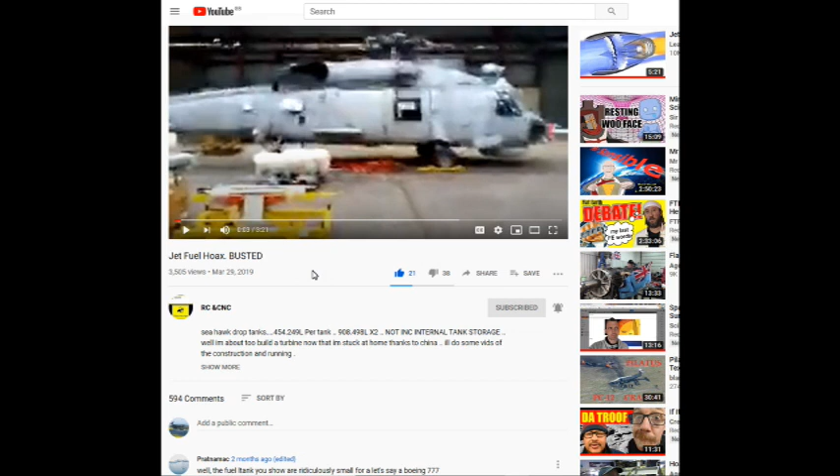I've been having a bit of a laugh over here on this channel, RC and CNC. It's a video by an Australian chap who's obviously worked on Australian Navy Seahawks in some form or another, and he's made a little video showing off the fuel tanks etc. of the helicopter.

It seems to have attracted comments from some real muppets in the world who have got no idea of reality. In one particular case, we have a Greg Lavy. He seems to be quite vocal and wants to make a big song and dance that he is Mr. Simpleton.

He quotes a passage from an article written by this Maxwell Chapman, who was highlighted on another Truther channel. It's hilarious to read it, and there's no way this Maxwell Chapman could even have possessed a pilot's license. He is so stupid, but truthers believe rubbish like that with no facts or proof. They're so simple, they'll believe anything. Clowns, really. But let's have a look down here.

One of Greg's - Greg has started these conversations demanding where 36,000 gallons go in a 747. We shall come back to that in a while, but let's look at this particular entry of his.

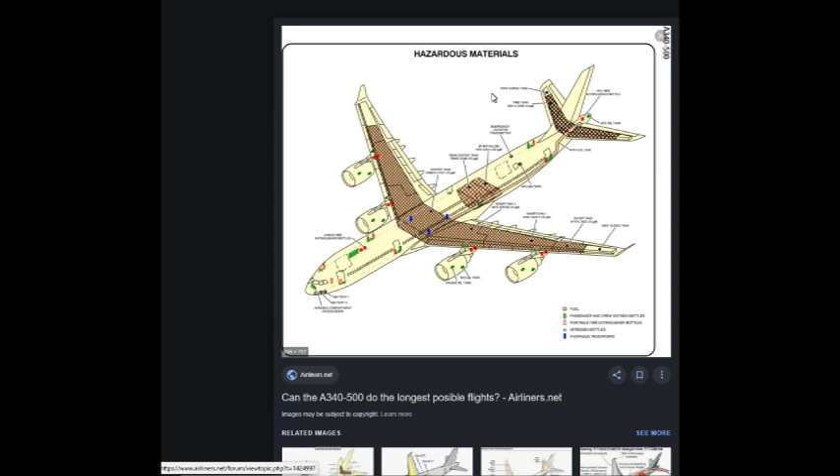So I think you're a bit of a clown really, aren't you? Because you need to look at these figures. Ladies and gentlemen, this is Greg. Greg's a clown.

And we shall now show him where his 36,000 gallons will go on a 747-400. And that 14,521 gallon figure he quoted also can go on a 747-400, despite him using that schematic of a 340-500.

Let's take a look. Oh, look at that - 25,000 gallons in just 2 tanks. And we have a total of 53,864 gallons in the entire aeroplane. And if you've got the 747-400 with the optional horizontal stabilizer tank, that increases its capacity to 57,164 gallons.

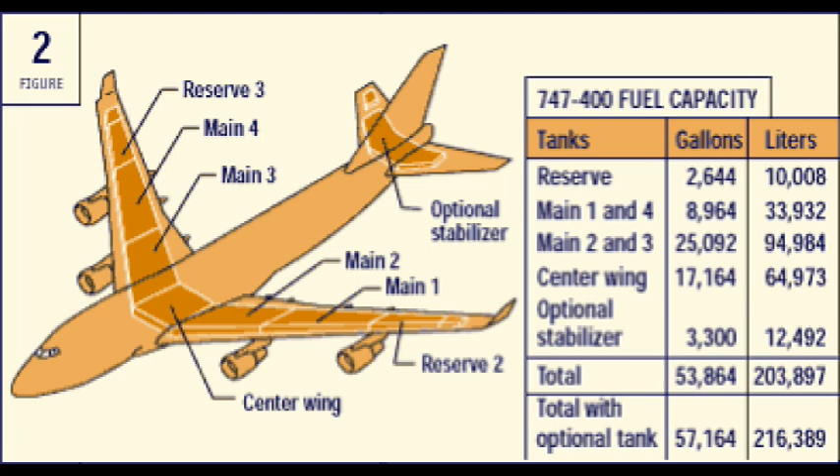So Greg, now feeling a bit foolish? You don't seem to have done much research here, have you, boy? It is clear that Greg thinks he's Einstein here, but in fact we can all see he's one of these - a clown.

But his comedy routine isn't finished quite yet. There's another one of his comments we've got to have a look at. That's very, very hilarious. And now let's see what Greg has to say for himself in this comment.

He's claiming he's got the facts that common sense would eradicate on sight. What does that mean? We've got a 747 - Boeing has 3 tanks in each wing. Technically, yes. Those hold, an inner tank, 6,472 gallons - never heard of one of those things on a 747.

An outer tank one with 1,623 gallons, another outer tank 2 of 9,182 gallons, a centre tank of 14,512 gallons.

And the same on the other side of the wing, with the exception of the centre tank. A rear centre tank of 2,015 gallons, a tail trim tank of 2,209 gallons on one side, and another one on the opposite side of 2,209 gallons, bringing a total of 55,499. Over the years, I have worked on many 747s.

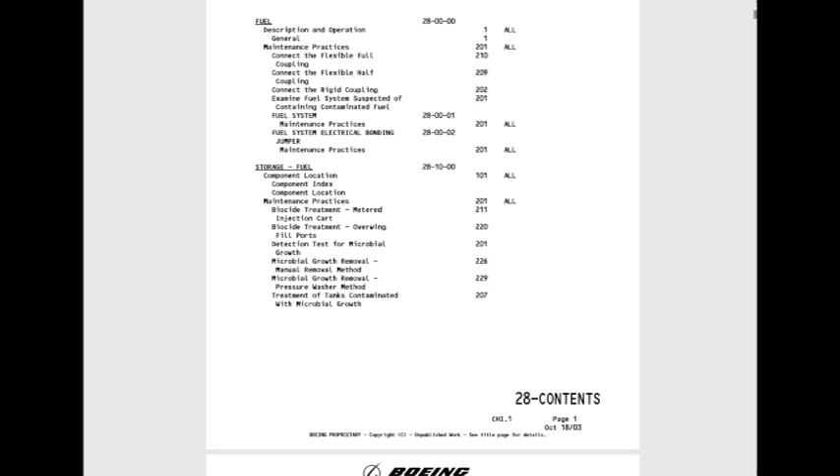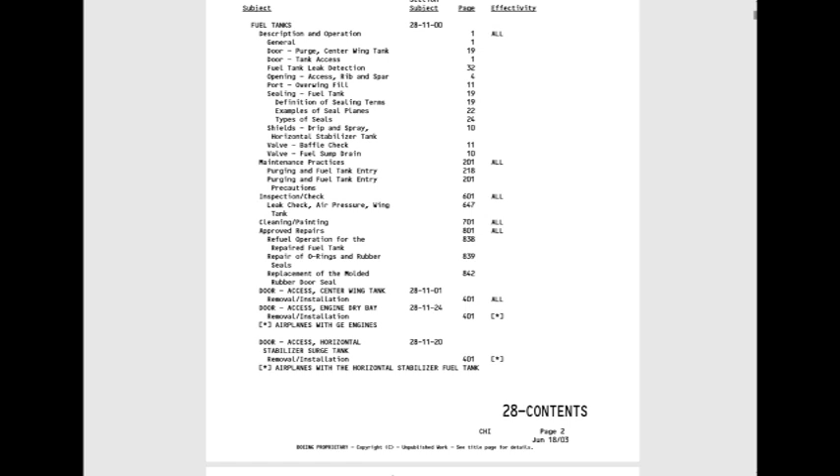Firstly, let's have a look in the actual aircraft's maintenance manual. Nope, can't see anything listed here for trim tanks. No trim tanks, inner tanks. All I can see is access doors, fuel pumps, valves, pipework. Interesting, really.

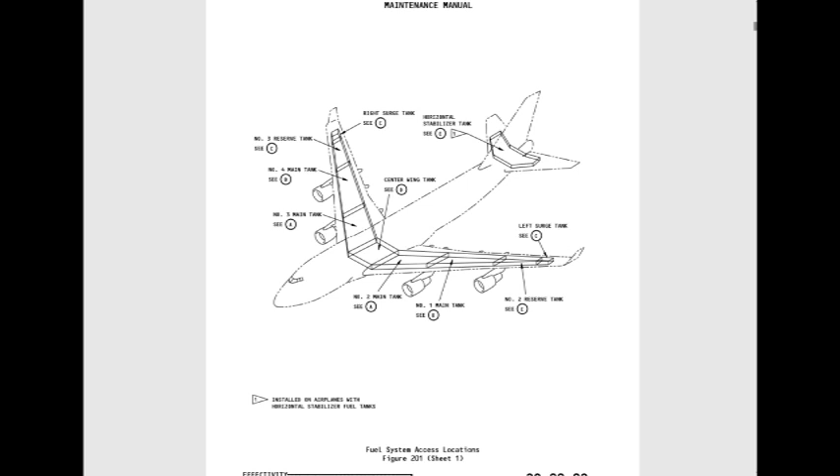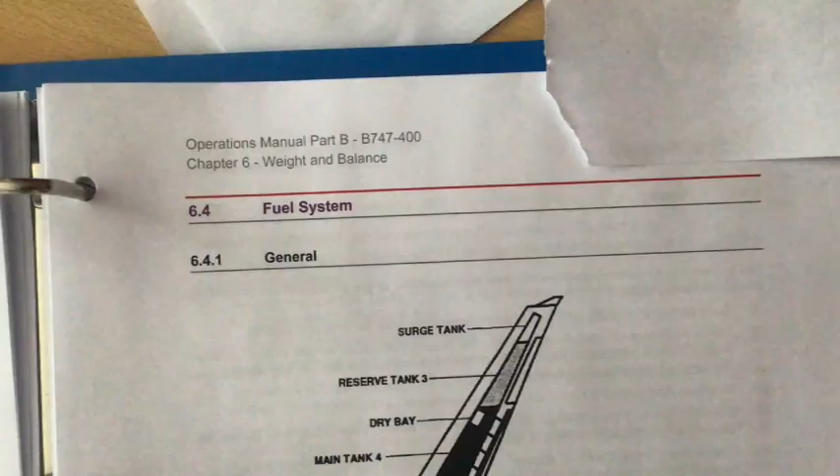Well, we'll double check in the weight and balance part of the operations manual for the 747-400. Here we have the tank layout of the aircraft, and it clearly highlights how much of the wing is taken up by fuel and how much is left for the flying controls, etc.

Let's have a look at the designations by Boeing. We have a surge tank at the wingtips, or the outer part of the wing. This is normally a dry area and will facilitate any overspill of fuel to leave the aircraft, and to let, during the refueling process, the escape of the fumes, to vent through and out to prevent overpressurization of the wing.

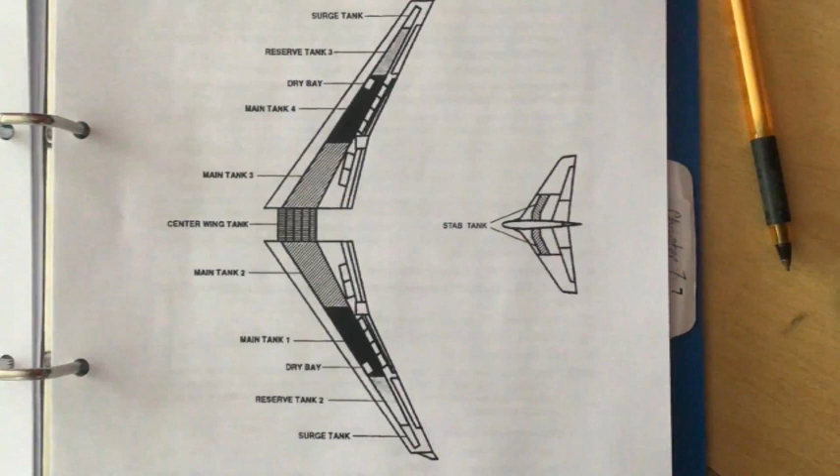Inboard of that we have the reserve tank, tank 2 and tank 3 on the right hand wing. Then we have main tank 1, then main tank 2, then the centre tank, then main 3, main 4, and we have a jumbo here with the optional extra of a stabiliser tank.

I can't see any inner, outer tanks or trim tanks mentioned there, or rear centre tanks.

So Greg, you got me to thinking, where have I heard those terms for tank identification before? Well, it so happens I also qualified to work on Airbus products, such as the A330-300, like this one, and the A340-600, like this one. As part of the A340-600 training course, we're also educated on the A340-500. We best take a look at some of the Airbus facts and figures then, shall we?

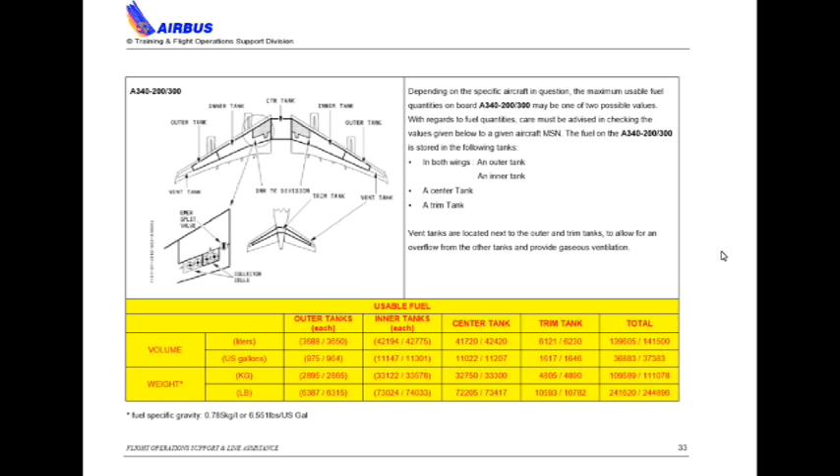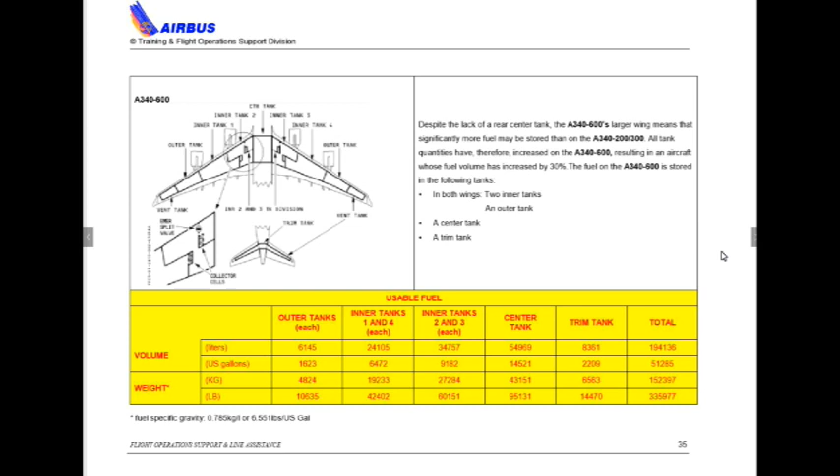First off, the A340-200/300 series of aircraft. Look, they call their tanks outer, inner, centre, trim, but unfortunately these aren't the fuel quantities that our clown Greg was talking about. But at least we've got the terminology correct.

Now we'll look at the A340-600. Again, we've got outer tanks, inner tanks, centre tank, trim tank, and the figures are starting to look like Greg's, but we're missing an extra tank. But we're on the right track now, so we'll have a look at the 500.

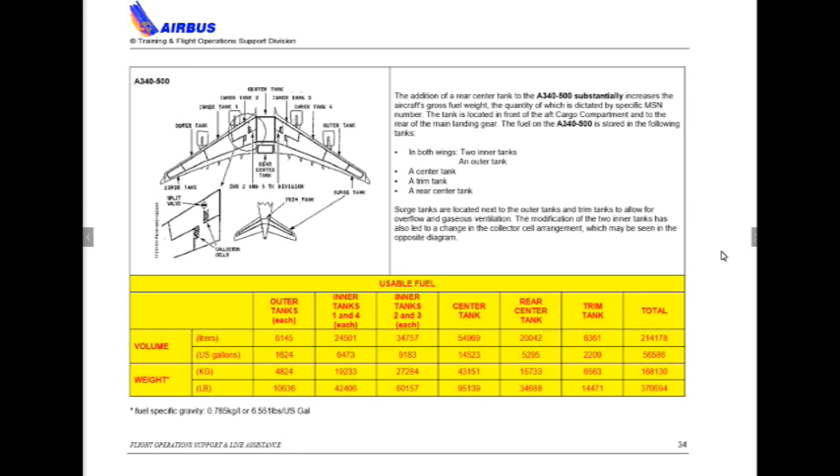And look at this, the 500. We've got outer tanks, inner tanks 1 and 4, inner tanks 2 and 3, centre tank. We've got a rear centre tank, trim tank.

He does like getting his confusing A340-500s mixed up with 747s. It's like he doesn't know what the aircraft are. But let's have a compare of his figures.

Looking at these figures, Greg, you're not far off there, are you? We've got, as you say, an outer tank that holds 6,472 - oh sorry, you call it inner tank. Well, there we are. Inner tank 1 and 4 hold 6,473 gallons. What's a gallon between friends?

Well, you've got the centre tank, right? I suppose you can't get that wrong. Again, you're a gallon out, or a few gallons out on that one. 14,523, and you got it down as 14,512.

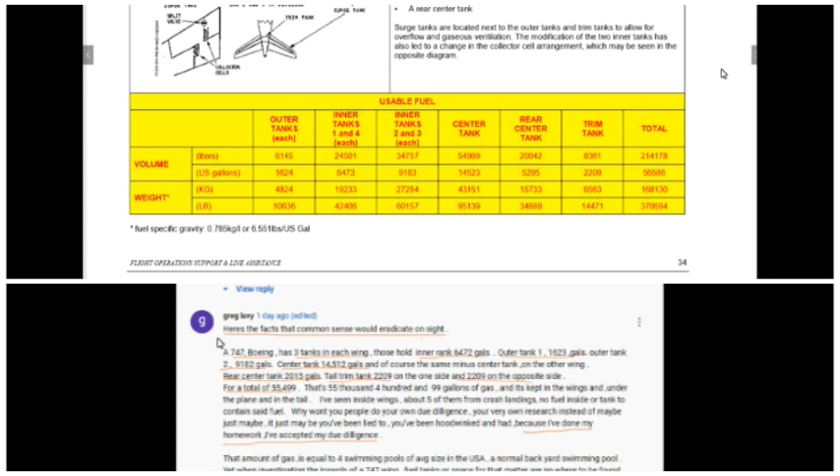What's that, Greg? What else have you written? Oh, let's have a look what else you wrote in that comment, shall we?

Once again he waffles on about swimming pools, etc., and how this aircraft would be heavy, and all that fuel on board when it lands would be uncontrollable.

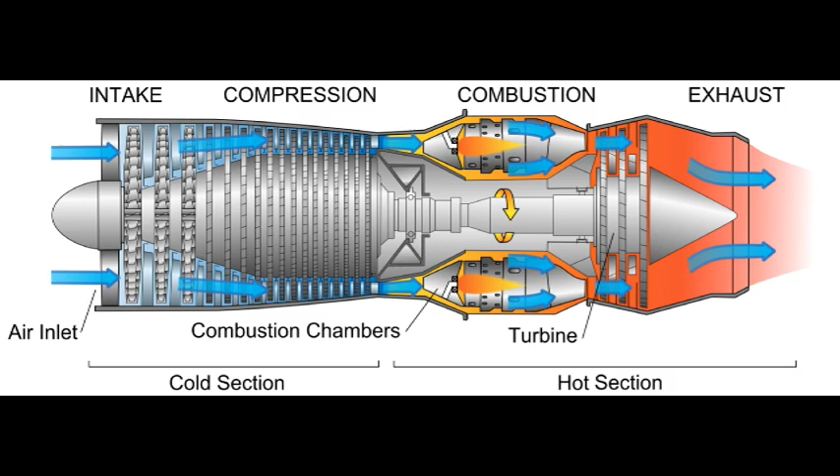Well, Greg, this is like having to teach a child. Strangely enough, when an aircraft gets refueled, it becomes heavy, and when it takes off, it flies. Its engines are using that fuel, turning and burning it, and as they burn that fuel, they consume it. The quantity goes down, and when the aircraft comes to land, it is a hell of a lot lighter than when it took off. So completely controllable.

Then our clown waffles on a bit more about how he is so much superior and has this great intellect, blah blah blah. Then he brings in more conspiracies, showing he's obviously a Holocaust denier because he claims only thousands were killed, not millions as everyone is told. Pathetic little boy. And then his plandemic - I think you mean pandemic, not plandemic, you fool - again hinting the coronavirus is a hoax. Well, sad little brain, sad little man. You need to grow up, go to school, study, and get educated.

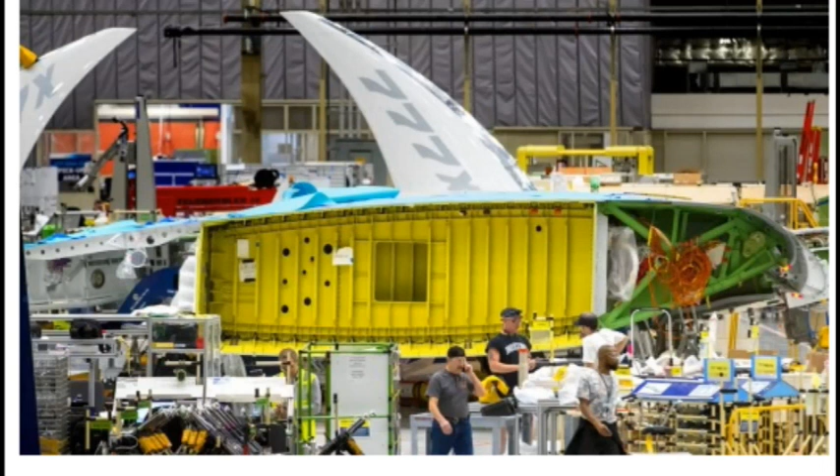Come on, Greg, it's not that hard a question, is it? Okay, you're the simpleton, we know. Well, the bucket would empty, wouldn't it? There'd be no liquid in it. So if you took a wing and put a hole in it, the fuel would drain out of it. Simples. Let's take a look at wing construction, shall we, for you?

A wing under construction. This is the easiest way to explain where the fuel goes for you simpletons out there. First of all, we have the wing box, which is the main structural part of the wing. This consists of the front spar and the rear spar, and skin above and below, and in between the spars are ribs, many of them. These ribs act as tank baffles that restrict the movement of the fuel in flight with various manoeuvres and attitude changes, keeping sloshing to a minimum.

On the front of the front wing spar, we have the ancillary part of the wing, which is basically the leading edge aerofoil section with the leading edge flight control devices - whether the manufacturer calls them flaps or slats, they're there. In this void will be all the electrical looms out to the engines, and if the aircraft requires pneumatic piping, it will be there as well.